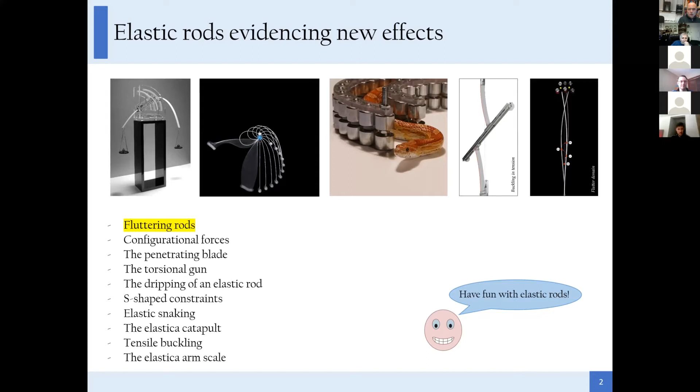Today, this evening, for me it's evening, I will speak about fluttering rods, which is one of these topics, and I will tell everything starting from the very beginning of this story. And this is my research team, the people who joined me in this adventure on Flutter instability. Alessandro Cazzolli is a PhD student at my department. Francesco Del Corso is professor. He was my PhD student and now he is associate professor here.

Oleg Kirillov spent 1 year visiting me, but now he is a professor at the Northumbria University in the UK. Diego Misseroni also took the PhD under my supervision and now is associate professor in my department. Giovanni Noselli is professor at SISSA in Trieste, and Mirko Tommasini was my PhD student and now he's an engineer, he's a consultant for an industry.

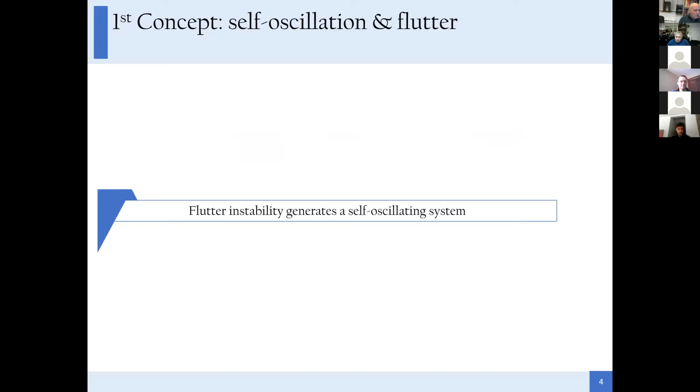So I would like to start from the first concept. First concept is self-oscillation and flutter. So the idea is the following. Flutter instability generates a self-oscillating system. What do I mean? It works like this. There is a steady input of energy, for instance, a steady wind or a steady flow of a liquid. And there is a system which takes the energy from these steady inputs and starts developing a self-oscillation at a given precise frequency.

There are many examples of this concept. For instance, heartbeats, firing of neurons, ocean waves, the put-put boat, which is a toy. I'm interested in the so-called flutter instabilities, which are the oscillations of the Volgograd Bridge and the collapse of the Tacoma-Narrows Bridge. Then someone might say, well, the Tacoma-Narrows Bridge was not flutter instability, it was resonance. Well, of course, this is a little bit a point of view, but the crucial point is that the wind was more or less steady when the Tacoma-Narrows Bridge collapsed.

So it means that we had a steady input of energy and the system bridge was able to create a motion, a cyclic motion of a given frequency. Of course, the bridge could not survive with this motion and it collapses.

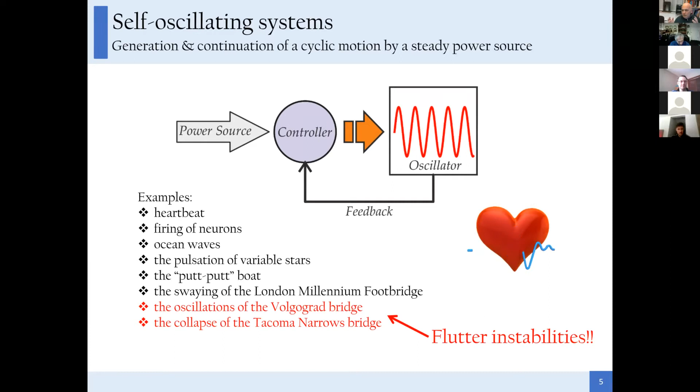So the second concept I would like to introduce, now I'm understanding that probably I did a mistake. Forgive me, I have to relaunch the, sorry, 1 second, please. Yeah, now we are back again. Do you see the screen, please? Yes, because, well, I don't want to tell you what was the problem, but we had a problem.

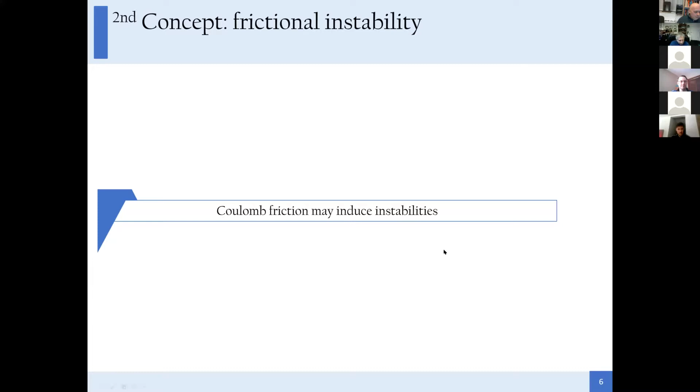So the second concept is that Coulomb friction might induce instabilities in elastic systems. And we hear now one of these instabilities, the so-called singing glasses. So friction is related to instability. The sound is an example of instabilities. There are other examples which are listed down here, and even the sound of a violin string is more or less an example of frictional instabilities, because if you oil your violin, it will not play anything.

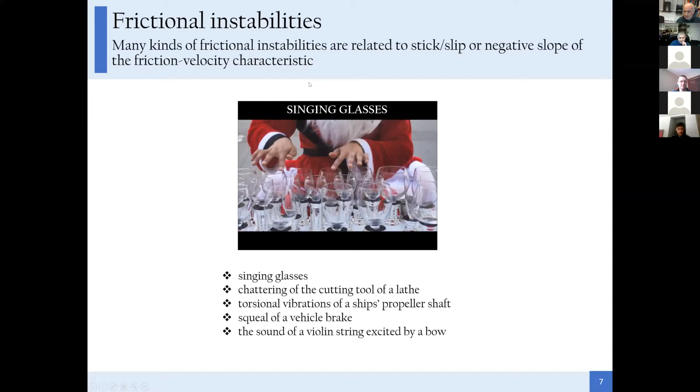My point is that usually these kinds of instabilities are related to the so-called stick and slip, or to the so-called negative slope of the friction velocity characteristics. So the thing I'm going to do is to refer to something simpler than that. I'm referring to dry Coulomb friction.

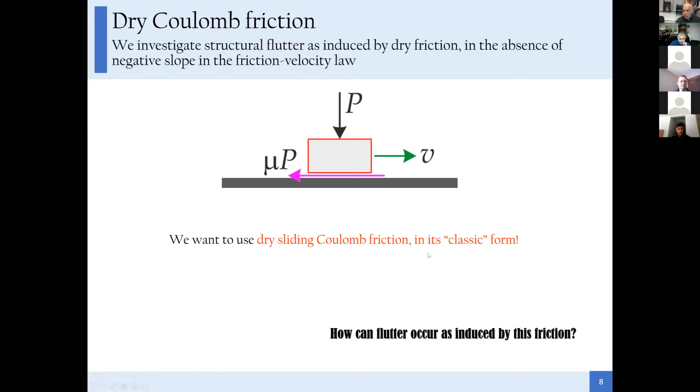The simple story which is told to students is that if we apply a vertical load P, then we can slide a block applying a horizontal load which is mu P, where mu is a constant coefficient. So my idea is to use dry sliding friction as a source of instability for an elastic system. And now let's go to the so-called structural flutter.

And the peculiarity is the way that the load is applied. It's not a dead load, it's a tangentially follower load. It means that when the pendulum swings, the force remains always aligned with the final rod of the system. Well, with this simple structure, Ziegler showed that there are no quasi-static bifurcations, and he showed that a classical stability analysis fails to give a correct answer.

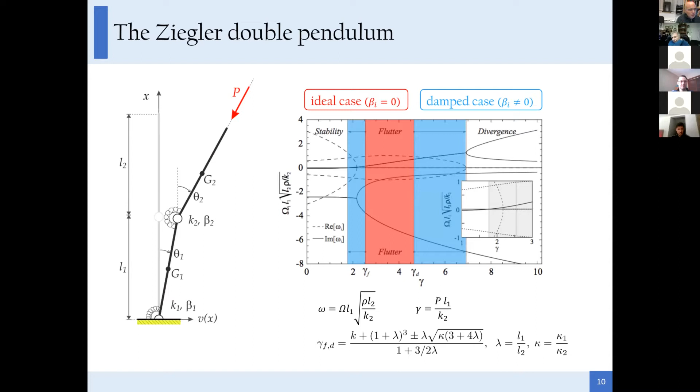If we introduce viscosity, something strange, I could say very strange, it has been called a paradox, happens. It happens that the flutter load decreases, which is apparently strange, because if you spoke to an engineer saying, imagine a structure which has a certain critical load, then add to this structure a dissipation, the engineer would say, well, the critical load will be equal or higher. No, it's the other way around. It turns out that the critical load is smaller. This is something so strange that it has been referred to as the Ziegler paradox, because if we calculate the structure for different values of viscosity, the viscosity predicts a lowering of the critical load.

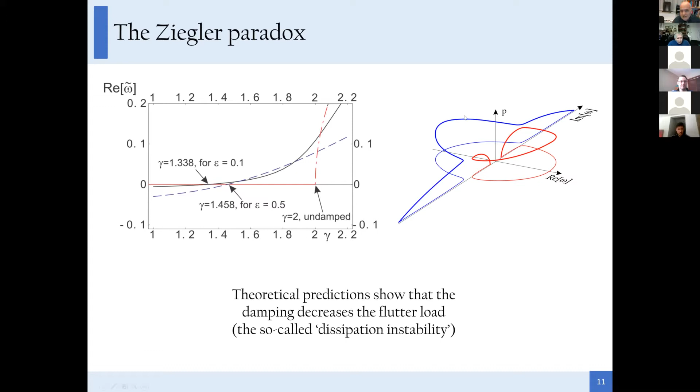And then, to be complete, the paradox continues because there is something even more complicated. The story is like this. Imagine we solve the structure with the viscosity. And then we take the limit for the viscosity going to 0. What we would expect to find is the critical load of the structure without the viscosity. No, this is not true. Actually, we find a load which is inferior to the load of the structure calculated from the beginning without viscosity. This is very strange. It's so strange that many people believed it was wrong.

And in particular, Professor Koiter. I like him. I mean, he was a great scientist, probably one of the best mechanicians ever. But nevertheless, he was very skeptical about flutter instability, Hopf bifurcation, and those things. And he wrote explicitly in one of his papers a statement which is reported on the transparency, and we may see it. He wrote, "I propose the elimination of the abstraction of follower forces as external loads from the physical and engineering literature on elastic stability."

So he was persuaded that a tangential follower load could not exist, and all this story was a sort of mathematical exercise without any mechanical meaning. This was his clear point of view. He pointed this out on several occasions. Well, there were people who attempted some experiments with flutter instability to demonstrate that this was in fact not, let's say, fantasy, but a real effect. One was George Herrmann and Nemat-Nasser.

They did some experiments with a fluid flowing through a nozzle, but in this case, it's not exactly the same thing, because if we let a fluid flow through a nozzle, there are extra effects in addition to the follower load. There are hydrodynamic terms coming into play. So these experiments are considered to represent an instability, but not exactly the same thing as the follower force.

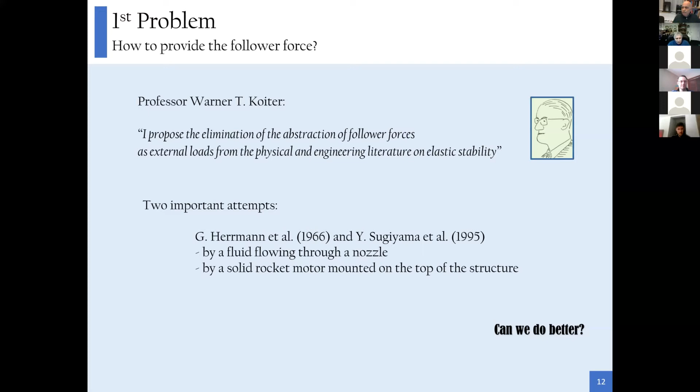Then there were other experiments done by Professor Sugiyama, who is a Japanese guy, he's an old person, and he made an attempt mounting a solid rocket motor at the end of an elastic rod. Well, we can have a look at an experiment. I have here a video of his experiment, so we can enjoy this video.

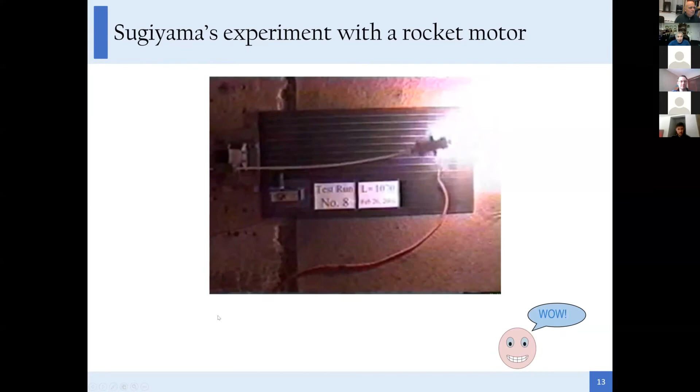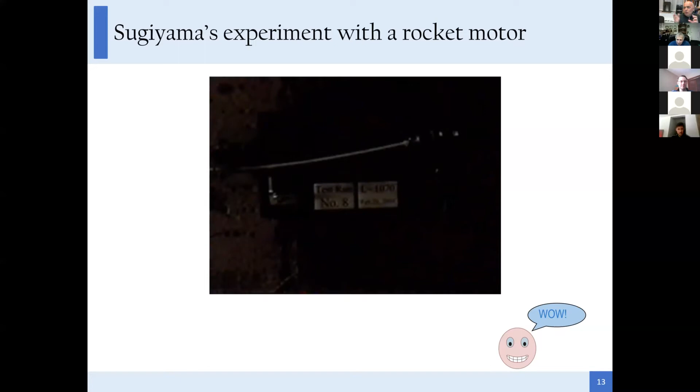If you want to attract the attention of the fire brigade on your lab, do that. So what we see here actually, it's the structure has this oscillation, which is probably Flutter instability, but please remember that the mass of the rocket changes very abruptly during the fire because it consumes. So people said that's not exactly a follower load because the mass is varying in time.

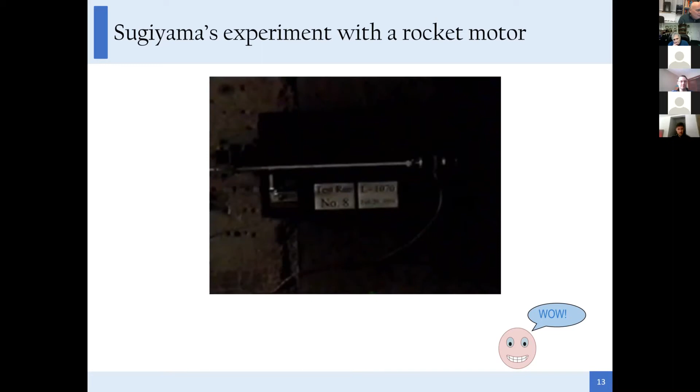And so we did our best to change this situation and to try to do something better. And the idea was to generate the Flutter instability using Coulomb friction. Apparently, this idea is very strange because people say friction is a mere dissipation. How can it generate an instability which is a vibration of increasing amplitude? It looks impossible.

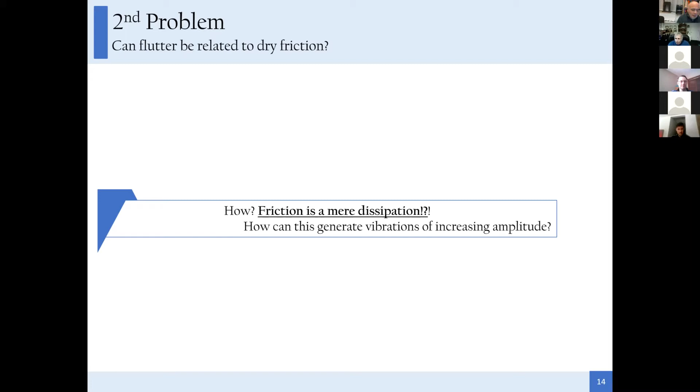In other words, imagine I tell an engineer, I take a structure which without friction is stable. Then I add friction to the structure. Can this structure become unstable? Engineers usually say no, but we know that we never have to say no. And the final idea, it's in fact very simple. This is the sketch of the idea.

We may see here the Ziegler double pendulum with the elastic hinge here and another elastic hinge there. Do you see my pointer, by the way? Hopefully so, yes. And the idea is we mount a freely rotating wheel at the end of the structure, and we force this wheel to slide with friction against an advancing plate at constant speed.

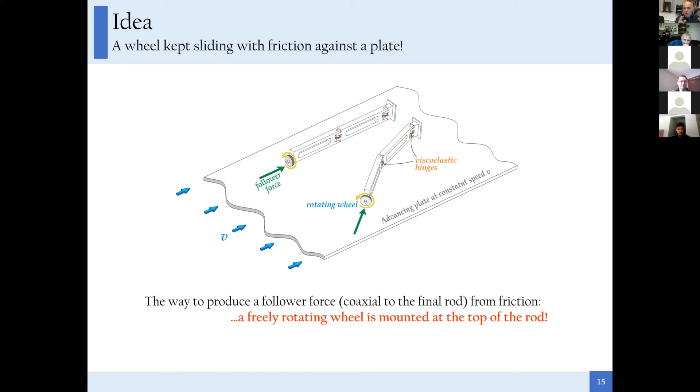So we move this plate down here against the structure, and since there is a relative sliding between the wheel and the plate, it generates a follower force, because if the structure is deformed, we can see that the force will always remain coaxial with the elastic rod. This is something that we thought more or less 10 years ago, and we did the experiments, and we proved theoretically and experimentally that it works.

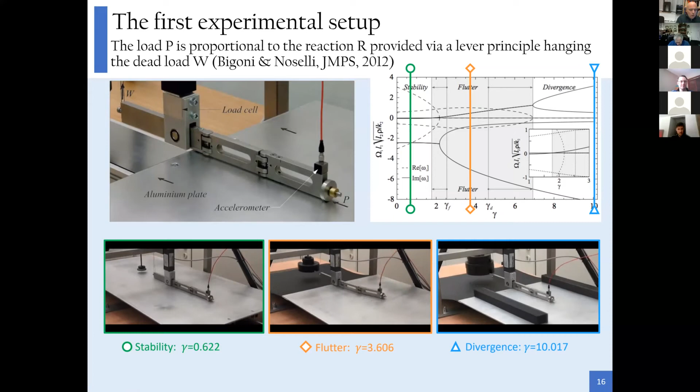But we wanted to do more, and particularly we wanted to analyze an elastic continuous system like this. We see here an elastic rod. It has a concentrated mass on the end, and it is subjected to a follower load P, which actually has a degree of follower. I mean, it is inclined with respect to the tangent at an angle that we can change and modulate.

Well, the equations governing the linearized kinematics of this structure are standard, and so the follower load enters only as a boundary condition and is sketched down here. So these are the equations. This is a known system, solved some 20 years ago by Detinko, a Russian scientist, who was able to calculate the Flutter loads analytically. We can do all this.

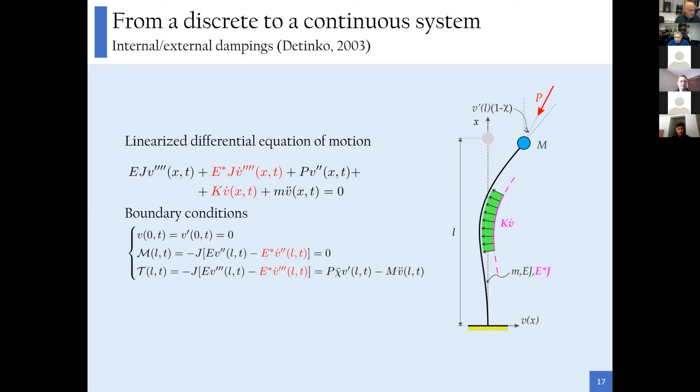But the problem is, are we able to design a machine to induce Flutter instability in this structure, exploiting the friction of the system? Well, that was not an easy stuff, and I can tell you why.

There are two reasons. We could not adjust the old system for these new experiments, first because we used the original structure as a lever. So to change the tangential load here, we had to change the vertical reaction, and to change the vertical reaction, we were changing the vertical load here.

This can be done with a rigid structure like this, but if the rod is elastic, then we have torsional buckling. And if we use a circular rod where the ellipse of inertia is a circle, then we do not have lateral buckling, but we do have large deformation to get the correct force. We have to deform this rod a lot to get the right vertical force. This was one problem, more serious than it may appear.

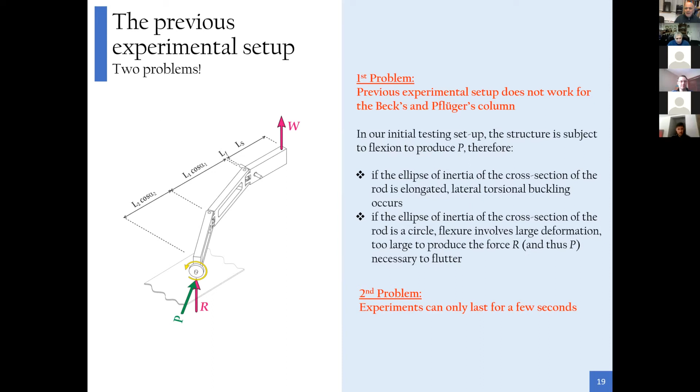And the second problem was that with the original machine, experiments were only taking a few seconds because the stroke of the machine was half a meter, and then the experiment was stopped. So we wanted to continue experiments as long as we desired, and so we designed a completely new machine for experiments, which is sketched here.

First of all, the load is directly applied at the end of the beam, on the head of the beam. We have a head here, we have the little wheel which is freely rotating, so friction is transmitted tangentially, but to apply the vertical load we have a glass plate which is pushing against these pressors which are almost frictionless, and in this way we give the vertical load directly to this element.

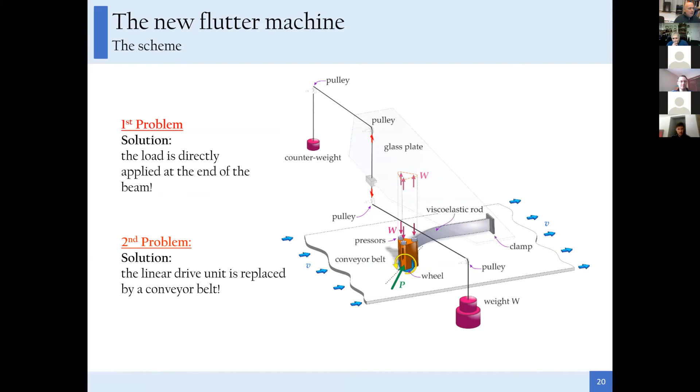And the second problem was solved because now it is not a machine with a stroke, but a conveyor belt which formally has an infinite stroke. It can go forever. So this is the idea of the machine. And let's see how we have realized this machine. Actually, we see a sketch of this.

White is the elastic rod. Then this is the head with a detail of the head. There is a miniaturized accelerometer on the head. There is the freely rotating wheel, a miniaturized load cell measuring the tangential load that we are transmitting to the rod, then the pressors, and this is the equipment. We can change the vertical load by hanging a given weight.

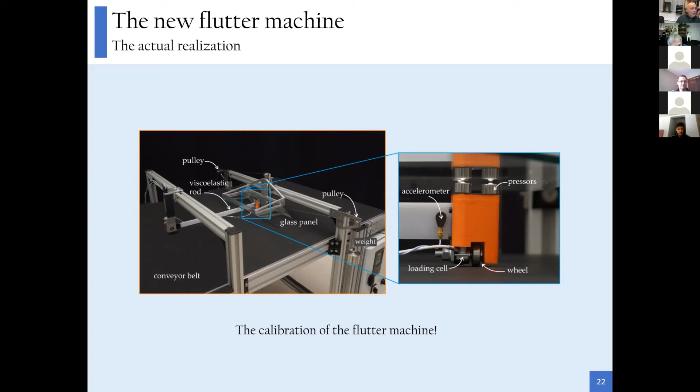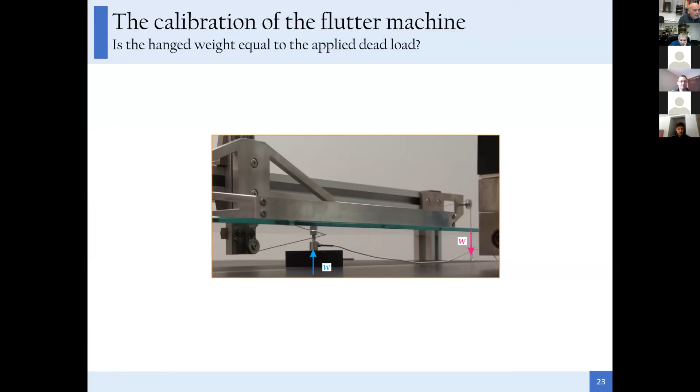This is what we have realized, but we have spent a lot of time in the calibration of this machine, trying to measure everything. For instance, what is the vertical transmission of load to the head of the elastic rod, or what is the exact inclination of the transmitted force to the elastic rod, or what is the exact friction rule, because we know that Coulomb friction is only an approximation, and so we struggled to measure experimentally, with independent measures, the correct frictional force at the wheel.

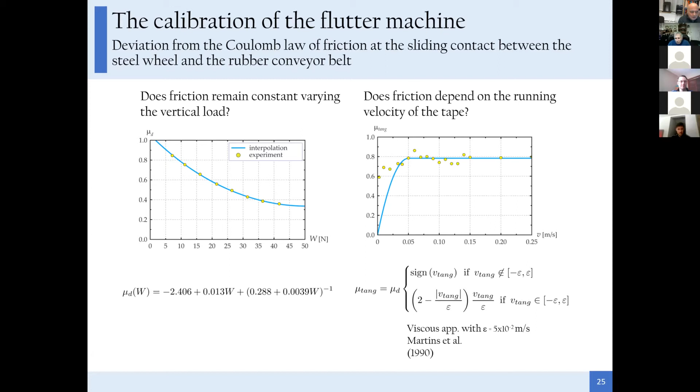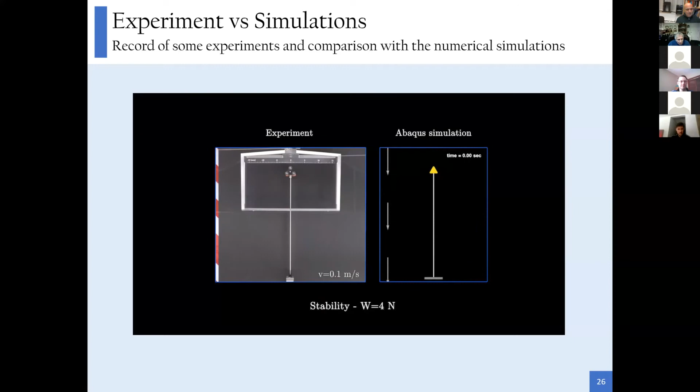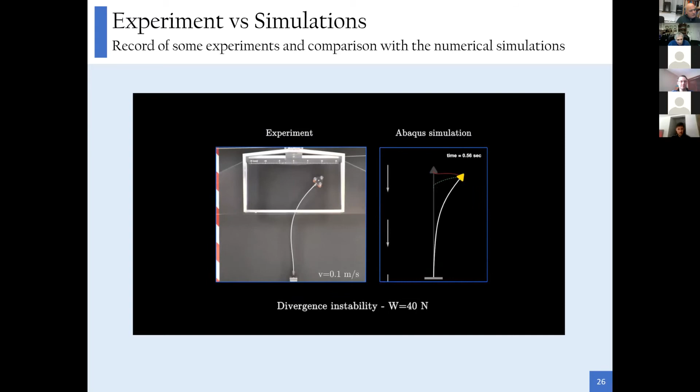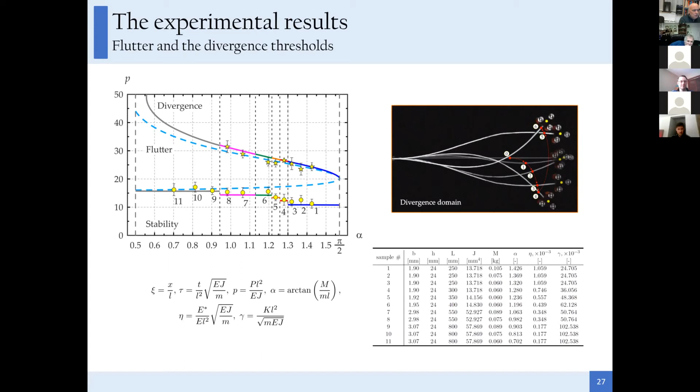And what I can point out is that all these experiments which were measured represent the first experimental proof of the destabilization paradox. We have been able to demonstrate that the inclusion of dissipation yields a decrease of the flutter critical load. This we were able to prove.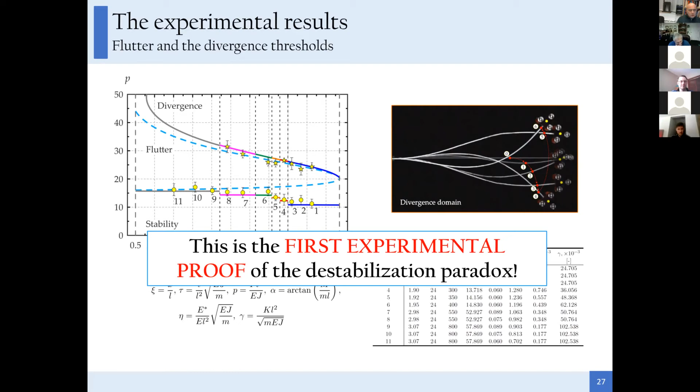So now we may enjoy a second, taking a break, and I would like to ask you, how many experiments do you think we have done? Because, well, you see one nice movie. Well, you may say, well, they did some experiments.

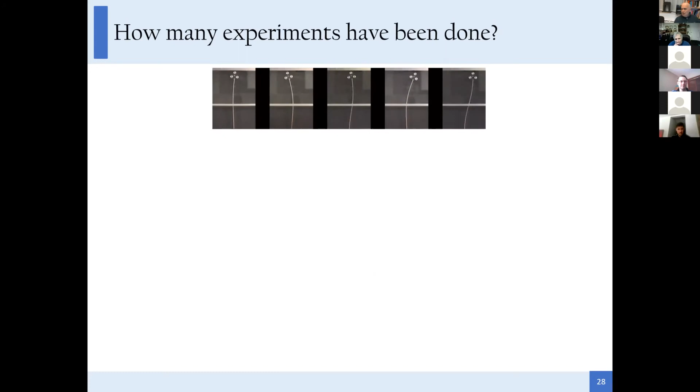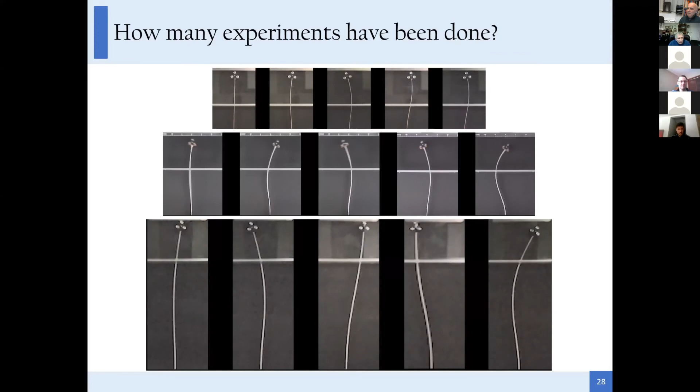Maybe we did many, or maybe we did a huge number of experiments. What do you think? How many? Well, this is the answer. We did at least 700 experiments. It took 5 years, and one PhD student really became mad in doing all this. 700 experiments without taking into account damping, identification, frequencies, divergences, slow motions, and blah, blah, blah.

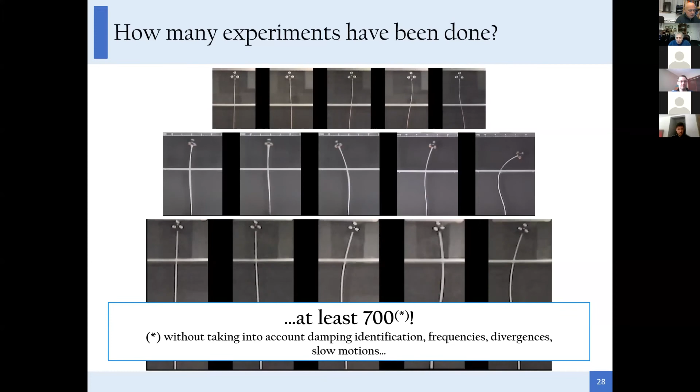Okay. So up to this point, we have seen how to use friction to create a follower force. Actually, it's dry friction to create a follower force. And now I would like to go into a related problem. People studying flutter instability know that there is another structure which is very simple, as simple as the Ziegler double pendulum, which evidences this flutter instability. It's the so-called Reut column.

This guy, Reut, was a Russian scientist who lived more or less 100 years ago. And he solved the problem that we see here on the screen. So we have again the two rigid rods, again connected with two elastic hinges, or viscoelastic if you wish. But there is this element which is orthogonal to the last rod and is simply a rigid dead element, a rigid bar. That's it. And the interesting thing is the way that the load is applied. The load is done in a way that it has to remain always on the same line. So it's not a dead load, it's another story. Actually, it's a non-conservative load.

Initially, when I saw this structure the first time, I thought, well, this load is nothing strange. It's a dead load. No, this impression is mistaken. It's not a dead load. It's a very strange load, which is a non-conservative load. It remains on the same line. So when the structure deforms, it moves along this rigid element, but remaining straight and moving forward and back on the same line.

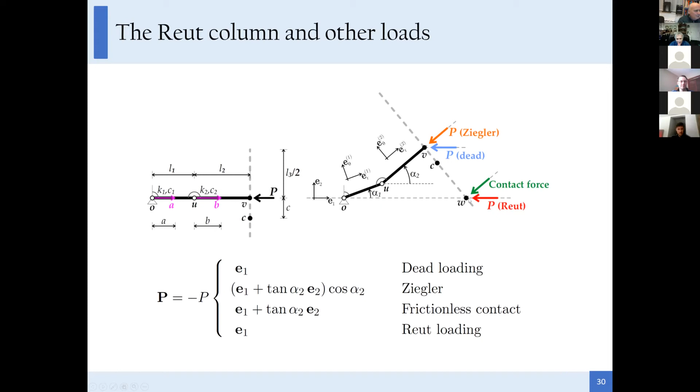So we have the dead load, the Ziegler load, the contact load, and the Reut load. The important point is that both the Ziegler and the Reut are unsymmetric. They break the symmetry of the system, the symmetry of the matrices. And we may see that the dead load and the contact load are symmetric. So Ziegler and Reut break the symmetry.

If we see these formulae, we may conclude that the Ziegler and the Reut loads are different, because actually the Reut load is the transpose of the Ziegler load. Yes, they are different and the dynamics is different, but all the behavior of the structure in terms of flutter, divergence instability, Ziegler paradox, everything is the same. So the Reut and the Ziegler loads have exactly the same flutter load, exactly the same divergence load, exactly the same Ziegler paradox.

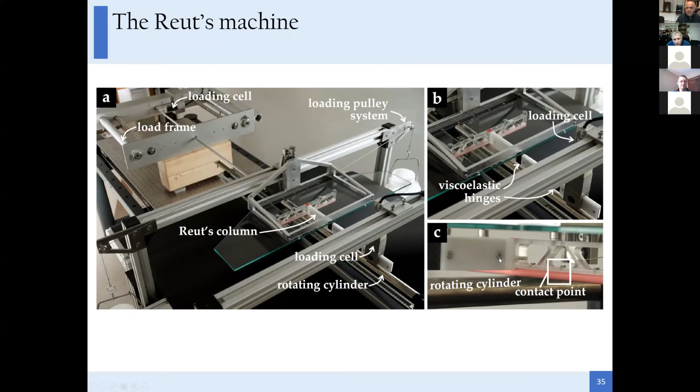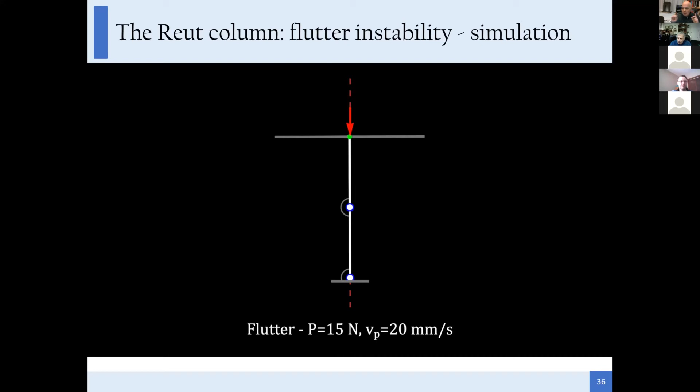Now, first of all, I would like to show you a simulation of this structure. So this is the flutter instability as the nonlinear equations tell us. We have integrated the nonlinear equations. So this is the flutter instability of the Reut system. We see that the dynamics is different from the dynamics of the Ziegler double pendulum, but the critical load is the same. And we may see that the force remains on the same line. It goes up and down, but it remains on the same line. The system reaches a limit cycle, so this is a Hopf bifurcation, and the system is self-oscillating.

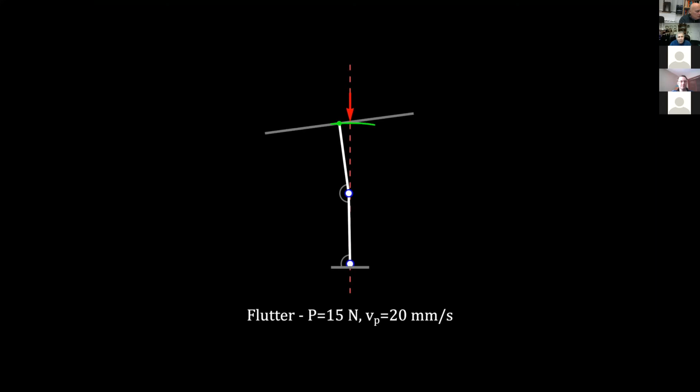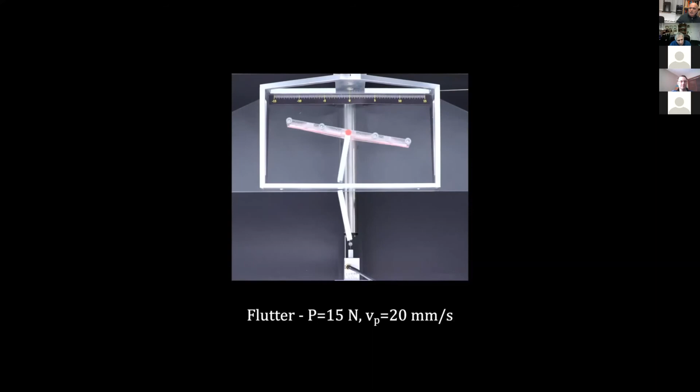This is the theoretical view. And now let's have a look at the experiment. We see it mounted from above. This is the experiment. We are forcing the cylinder to slide against the structure, and we see that it oscillates with a constant amplitude. So initially the motion grows, and then it stabilizes and reaches a limit cycle. So it is becoming a self-oscillating system. The input of energy is steady. We are forcing the cylinder to move, and this is the situation.

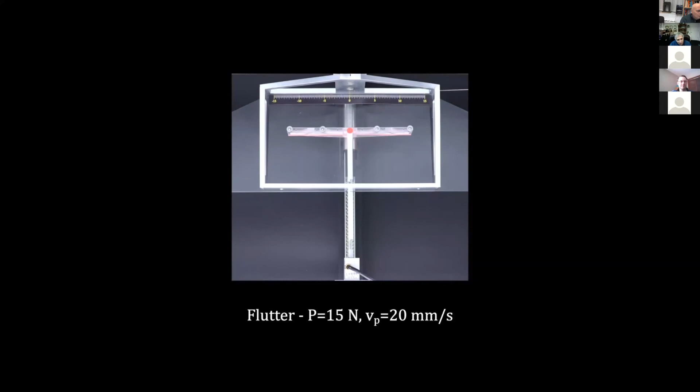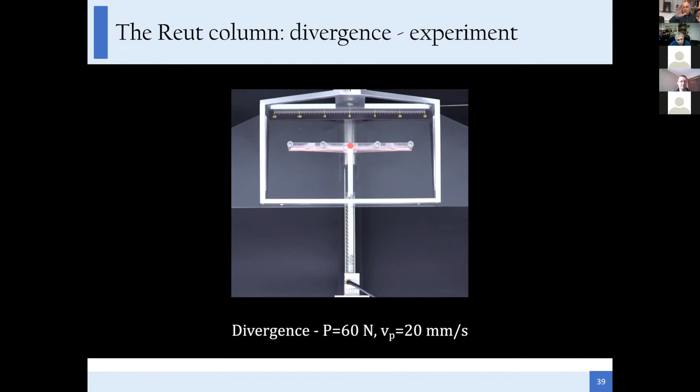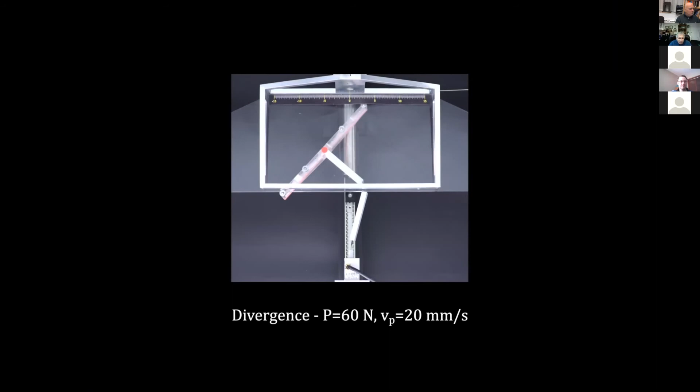So this is divergence instability. And again, the message is the same. Even in this case, we have been able to demonstrate that the Ziegler paradox is not a paradox at all, but it's an answer, a real answer of a real mechanical system which behaves this way. So the dissipation has a detrimental effect on the Flutter load and changes the Flutter region.

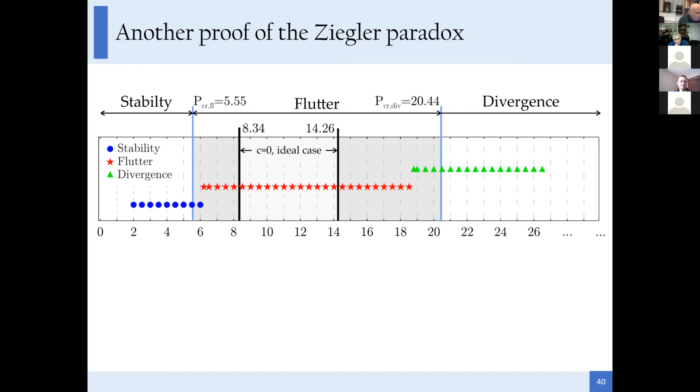And now I would like to come to the end of my talk with the last concept, which is the last one on this story. We grasped this idea a few years ago, and now we have reached some conclusion. The idea is the following: is it possible to get rid of friction? Because one can say, well, what happens if the wheel at the end of the rod cannot slide? I mean, it is a wheel which only rotates without any slip.

Well, this is called a non-holonomic constraint. We see here two examples of non-holonomic constraint. It's a wheel, as I said, rotating without any slip, and it's a skate, a perfect skate, let's say, that goes in one direction but cannot move in the orthogonal direction. Well, non-holonomic constraints are applied to the velocity, not on the position.

What does it mean? Well, take the skater. The skater can reach every point in the plane. The lady skating can go everywhere. There are no forbidden positions. But the non-holonomic constraint says the skate can only slip in the direction of the skate, and then you can go around turning and doing things. So it's not a constraint on the position, it's a constraint on the velocity. That's it. This is the essence of the non-holonomic constraint. And the easiest of these constraints is exactly the non-slipping wheel, the skate, the perfect skate.

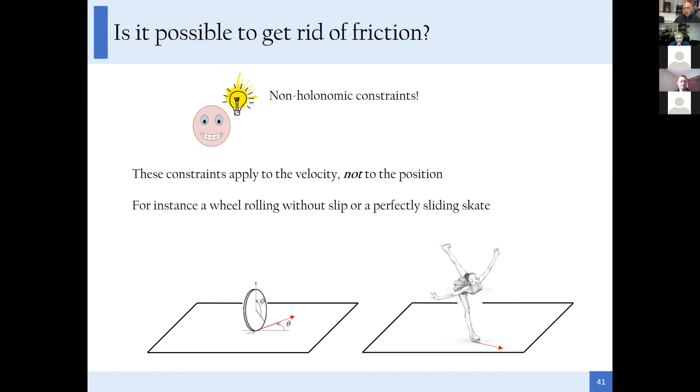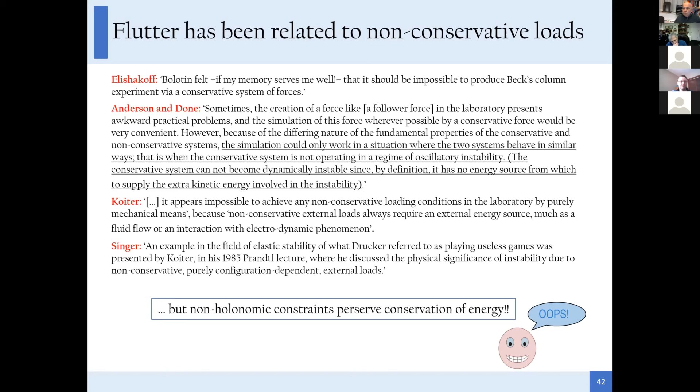So we invented these systems. Actually, these systems are the same you have seen before, but now there is no slip. The wheel can freely rotate, the cylinder can freely rotate, but without slip. Slip is out of the equations. It is a non-holonomic constraint.

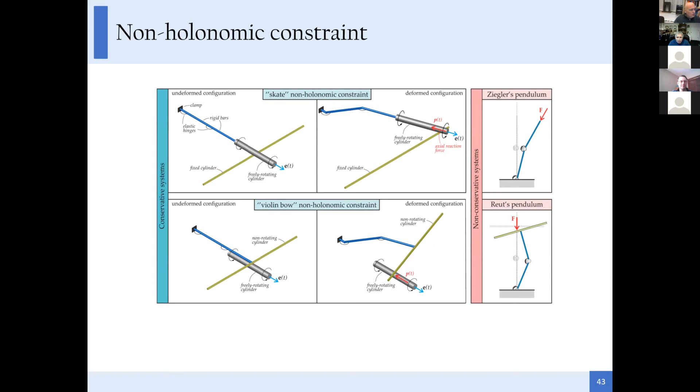We did it for the Ziegler double pendulum, and we did it for the non-holonomic Beck or Reut rod. We analyzed all these cases, all these situations. It turns out that a viscoelastic column subject to the skate or the violin bow, we called these two non-holonomic constraints. One we called skate because it looks like a skate. The other we called violin bow because it resembles a sort of violin bow.

So let's start from the beginning again. A viscoelastic column subject to the skate or to the violin bow constraint, and the same structure subject to non-conservative loads of the Ziegler or Reut type evidences exactly the same critical loads for Flutter, Hopf bifurcation, and divergence, and the same Ziegler paradox with the same directionality dependence occurring when multiple sources of dissipation are considered.

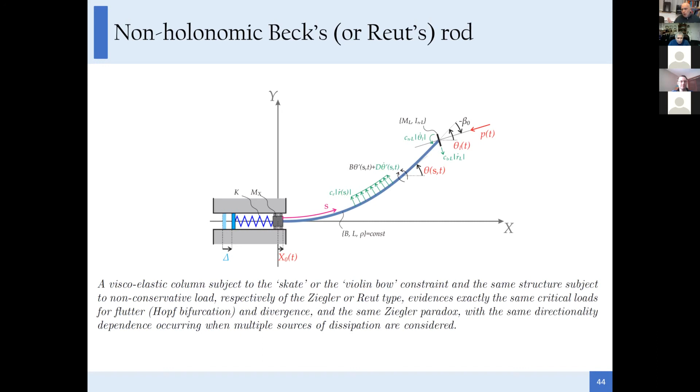So I'm saying this: the linearized version of the non-holonomic constraint shows exactly the same behavior, exactly the same equations as the non-conservative structures. So we have found an equivalent of the non-conservative loads obtained with non-holonomic constraints. And these are the examples of the structures that we have analyzed. So please, on the right end of the structure, there is the skate, so a wheel which cannot slip. And on the right, we applied a dead force.

I'm sorry, it's not clear. No, sorry, it's not a dead force. On the left, we are compressing a spring, a linear elastic spring, until the structure becomes unstable. So the way of loading this structure is conservative because it's squeezing an elastic spring. And on the right, we load the structure with a dead load, like a stone in the gravity. So on the left and on the right, we have two ways of loading these structures, which are fully conservative. So in these systems, the energy is conserved.

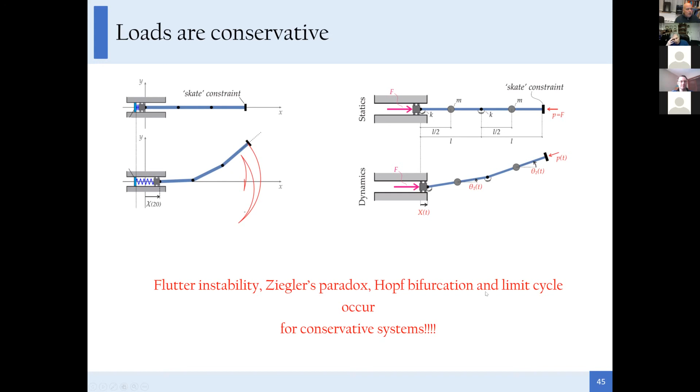And what we see is a Flutter instability, and we see that the system reaches a limit cycle. So we found the Flutter instability, the Ziegler paradox, Hopf bifurcation, limit cycle, and these systems are conservative. And here is a sketch of a solution. We are loading with this dead force this double pendulum, with this non-holonomic constraint, no slip, and we see that the structure starts oscillating, reaching a limit cycle. We see it on the right. So the motion is amplified, and then it reaches the limit cycle typical of the Hopf bifurcation.

And now I'm going to show you a couple of movies of simulation, how these structures behave. This structure is loaded with a dead horizontal force. It is sketched horizontal, but you can imagine it vertical with a load, with a stone put on it. So this is the behavior. It has this Hopf bifurcation, critical load, etc., Flutter, everything. It behaves like the Ziegler double pendulum, at least in the linearized version. When the displacement becomes large and the non-linearities prevail, then the two systems become different. But initially, they behave exactly the same.

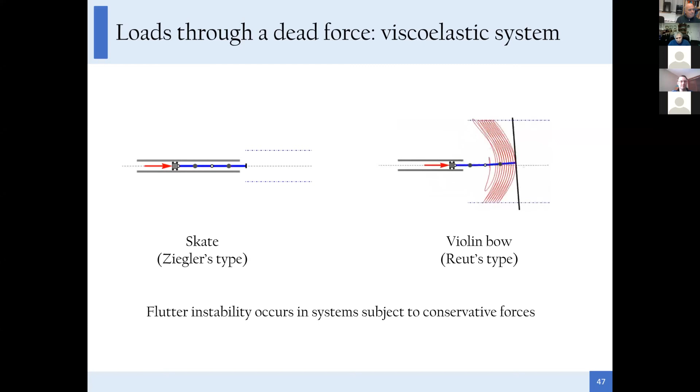And now the other way that we can load this structure is compressing this linear elastic spring. So we compress the spring up to the point when the force in the structure touches the limit value. At that point, the structure moves and dissipates the elastic energy. So in this case, we do not reach a limit cycle because it cannot be reached, because there is a fixed amount of energy.

So let's have a look. Initially, we see only the spring moving. Now it's only the spring moving, compressing up to the critical load, and then the structure starts oscillating and the energy is dissipated. Yeah.